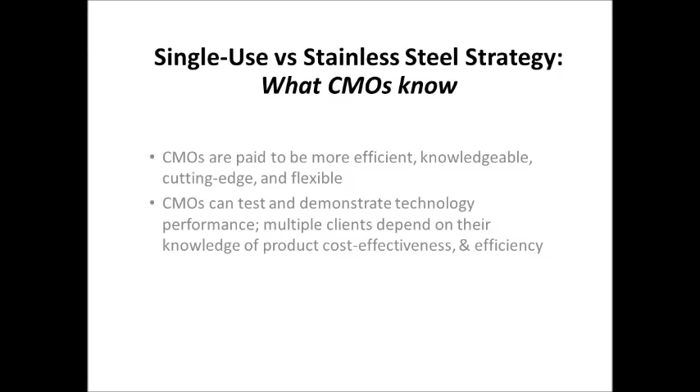So what we want to do is focus on what CMOs are doing in terms of cutting-edge technology. From our 13th annual report, one of the questions we asked is what are the new product development areas of interest to biopharmaceutical manufacturers and CMOs. We asked what are the top areas that suppliers—the likes of Pall, Merck, Millipore—should be focusing their development efforts on. Essentially, where's the R&D going to come from?

New product areas of interest is not where things are broken, and it's not necessarily where the opportunity is or where the future will be. It's where things are potentially broken or not quite fixed. So when we look at what the vendors are being asked to do, this is where vendors' energies should be focusing on fixing something.

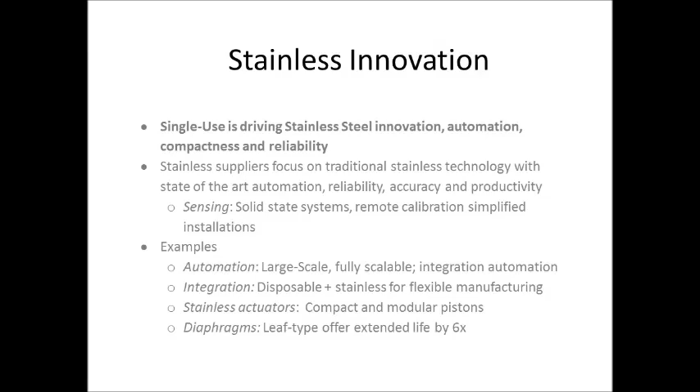So with that, what I'd like to do is turn the presentation over to our first presenter, Danny Vellom. Thank you, Eric—I'll just take your chair. Hi, I'm Danny Vellom from Sanofi Pasteur, and we're the vaccines division of Sanofi.

As an industry, the vaccine industry is pretty conservative. We've grown up making products for babies and infants, so safety comes first, and our ability to move into new technologies sort of follows that same philosophy.

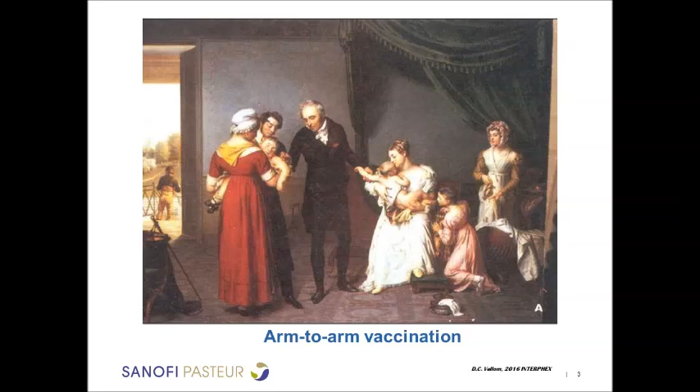First, the disclaimer statement, because we are big pharma—we'll go past that. I'd like to start with a slide of the very first vaccinees under Jenner 200 years ago, but then move quickly. As vaccine technology evolved, we got beyond Jenner and into the childhood vaccines of the early part of the last century, and it continued to evolve. The technologies have gotten more and more complex for making vaccines.

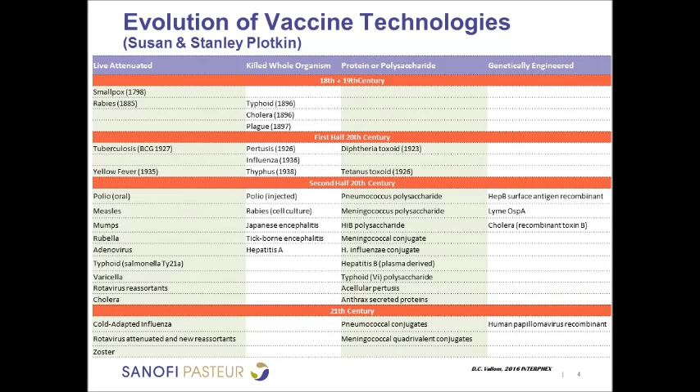Additionally, we have this continuing evolution away from stainless to disposables. So it's a complicated business being in vaccines—there are so many different antigen types and so many different modes of production. Most of my work has been in live viral vaccines.

And in particular, relating back to the first slide, my first product development effort that fell completely under my responsibility was for the new cell culture-based smallpox vaccine. It's a unique system in that we're growing vaccinia on suspension cells, vero cells. The vaccinia virus is too big to filter sterilize, so everything we had to do from the get-go is aseptic.

We had to integrate quickly because after 9/11, we had to integrate everything we could with single use, since fabrication time and engineering time is much longer with stainless. So we jumped into it quickly.

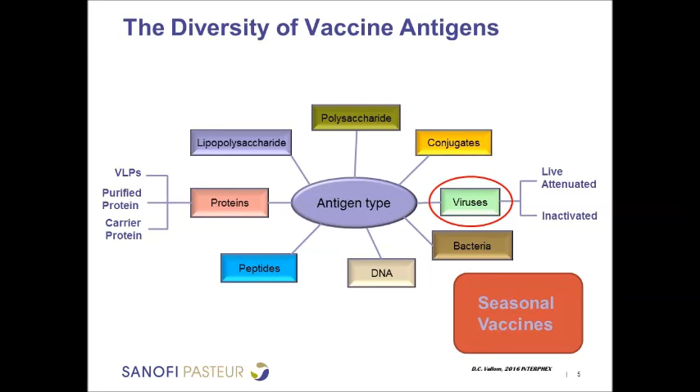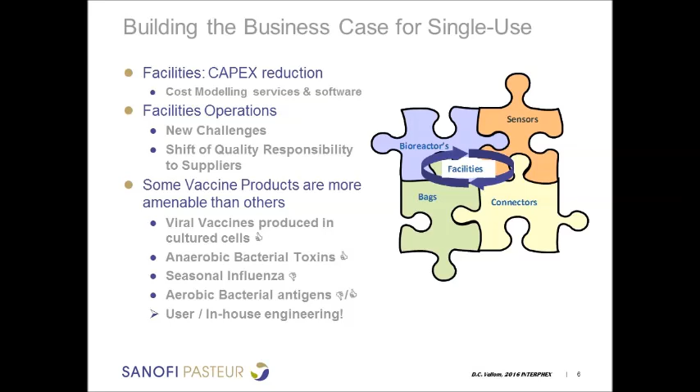The spectrum of available technology within the single-use realm has expanded and continues to, but with this expansion we've had to start to worry about standardization and how all these things are going to fit together. And then, as Eric mentioned, leachables and extractables have become a major focus recently.

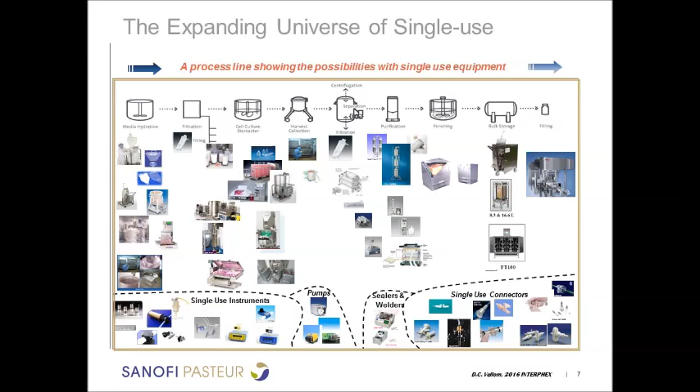But we've had to focus very much on a supplier relationship, because just getting a bioreactor bag in the mail or in a cardboard box doesn't get you to production. A lot of time is spent working with suppliers to establish how these things are going to be unfolded and installed. This is completely new to our operators, so training has become a huge piece, and that interface with the manufacturers in how to install and make appropriate use of their equipment.

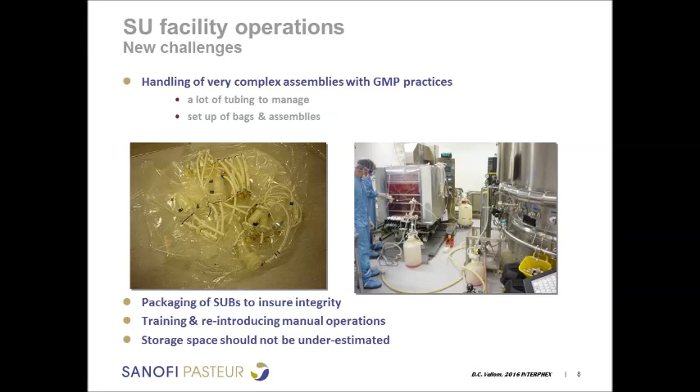So a couple of take-home messages. There are multiple benefits of working with single use. We end up not with completely single-use systems in most cases, but hybrid systems where certain pieces of equipment we have to rely on what was older technology for TFF and cell disruption, for example. These are inherently focused around high pressure and steamable systems, and so we have to then integrate the pieces that we can with single use.

But you also have to consider, not on the downside, but as important considerations, that this is becoming highly manual in terms of installing and appropriating, putting together appropriately your process gear. There are lots of new competitors out there in the marketplace. We worry about biosimilars and everything, because suddenly processing becomes accessible to almost anybody. It's essentially self-engineered. And then our change control system has struggled to move from stainless into the single-use realm because of the new sets of constraints and compliance measures around consistency of the single-use material that we get in.

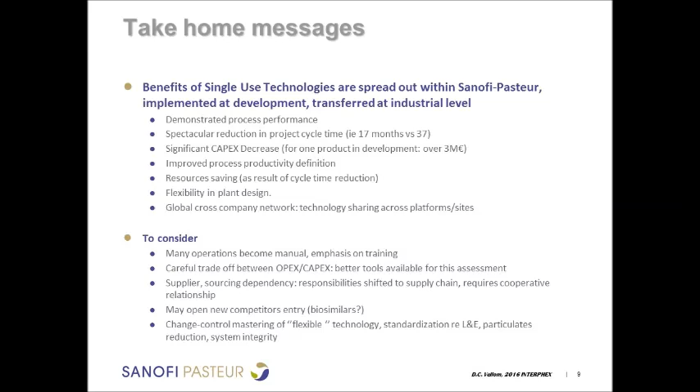And I'll stop there. The idea here is to start the conversation, so I went through this quickly, and thank you for your time. Thank you.

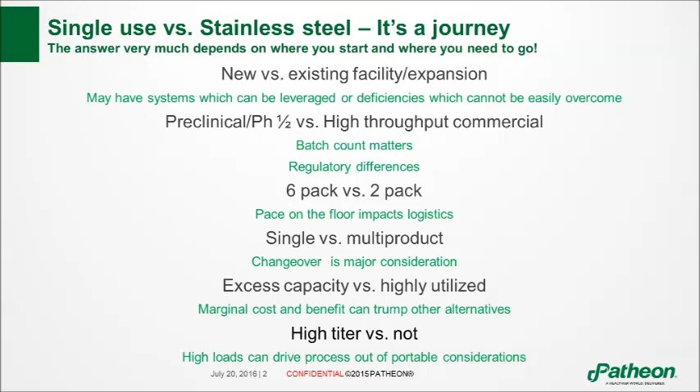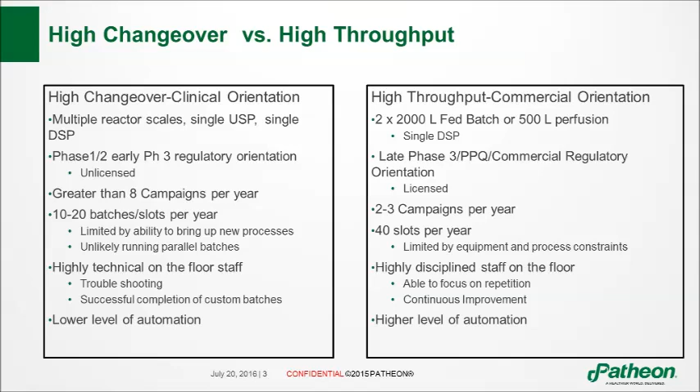So there are a lot of different components, a lot of different things you need to think about when making the decision. So what we did is we looked at two different operating paradigms. I would tell you there isn't a single system exactly like this within Patheon—these are kind of idealized systems. One is a high changeover situation for early stage products, and one is focusing more on commercial products. When you look at it, and came to the end of the day, the equipment was very much similar when we came up with our ultimate solution. But the people, the number of changeovers, the skill sets you need in both of these situations are very, very different, and it will impact your decision making.

So what we ended up doing, to develop a thought process, is we looked at a lot of the existing single use analyses, and a lot of them were single use versus stainless. We were interested in, hey, where are we with a hybrid? A lot of them were starting off at a low ramp. We were interested in, if we put a facility out there, low utilization as a contract manufacturer just wouldn't work. So we wanted to look at what happens when we drop in there and start off at well above 50% utilization, and situations like that.

And the other thing that's maybe a little different about a contract manufacturer is we're running multiple trains in parallel, whereas a small biotech company may never even come on the radar screen. But if we're running 3 or 4 downstreams in parallel, it really changes the game in terms of buffer prep, media prep, etc. So you've really got to think about where you are and where you want to go. If you want to do only clinical, you'll end up in one location. If you want to run a lot of lines, a lot of systems and support those, you could end up with a completely different answer.

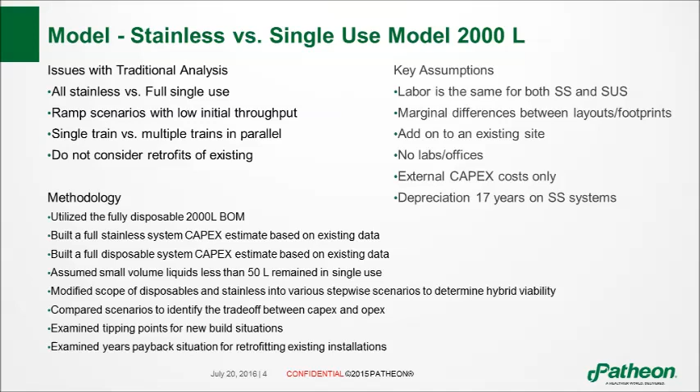We looked at the plant in basically 3 different components for these purposes: one was the prep systems, one were the hold systems, and one were the product contact systems. In this case, we looked at fully disposable and asked, what happens if we just change over our prep systems? We took our CapEx model, came up with a number of roughly $9 million for the CapEx differential, calculated a depreciation, looked at the OpEx differential by eliminating the disposables and other components, and then we ended up with both a tipping point and a payback.

The tipping point was roughly around 20 batches per year, where you might want to think about going from single use to start integrating stainless. The payback, on the other hand, was 300 batches. So if you're doing 20 batches a year, that's a long time. But if you're running multiple lines in parallel, and you think about running 40 batches a line, doing 100 batches a year, you could end up paying back on that in 3 years. So you end up with a completely different answer on the same analysis, depending on where you start and where you finish.

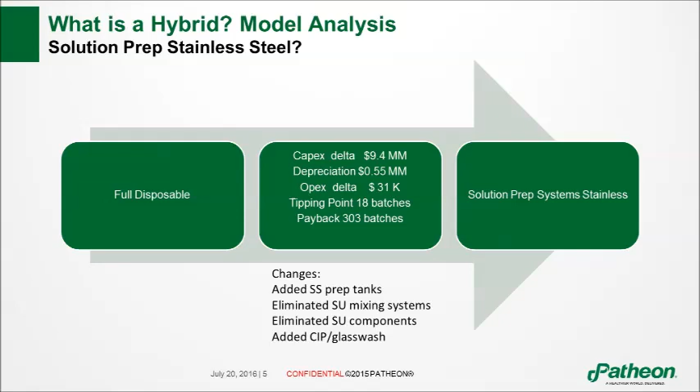And then just to wrap this up, looking at a few different parameters: what would cause you to want to do your solution prep in stainless, going from a fully disposable setup? Well, really, if you're running over 20 batches a year, that's when we want to start looking at stainless. But since we have a number of lines in parallel, it's probably something we would consider.

When would you want to flip your hold systems from single use to stainless? Well, at that point in time, you've got to start running higher throughput. You're now out of the realm of a facility-wide support system into the realm of a single line, and you've got to get better paybacks there. So your payback on the front end for your prep systems was higher. The payback on your hold systems was not as good, but there's still a lot of components there.

And then I'll finish off looking at product contact. Product contact was very interesting because there aren't as many disposable components in product contact as there are in all the support, the buffer prep, the buffer hold. As a result, once you've taken all the low-hanging fruit from your bill of materials, all you've got left is the product contact. Product contact is where your changeover, your cleaning validation - there are a lot of expensive systems there from a piping perspective, expensive components from a changeover perspective, and a really high hurdle to jump to get yourself from product contact going from single use to stainless.

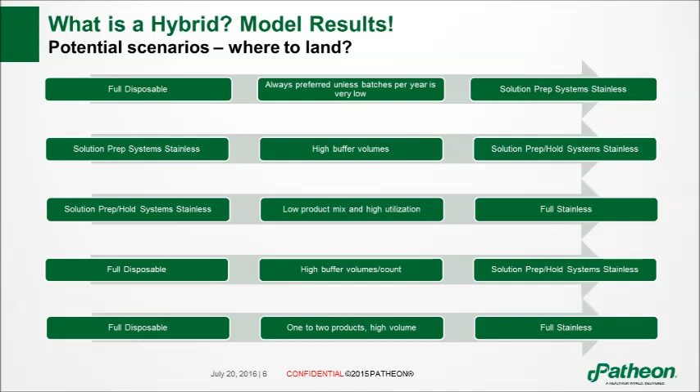Keep us moving on. Thank you. Thank you.

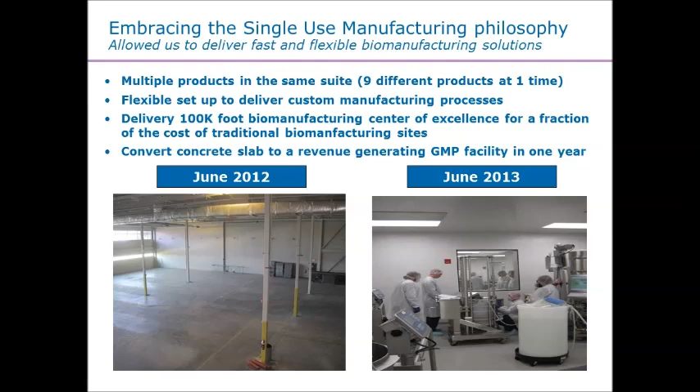I think the biggest key here was we made that decision in June of 2012, and by June of 2013, we had a facility that was up and running, making GMP material. And we were already starting from a revenue standpoint, being able to generate revenue out of that facility. That really can only take place from a single-use standpoint. That's really one of the big drivers of where and how we were able to embrace single-use as a technology, and what it gave to our customers.

It gave us the ability to turn around batches faster. We were able to reduce risk and simplify our design so that we're able to move products through. And when we're dealing with small to mid-sized companies, they need to get to that milestone. For us, single use really gave us that potential to deliver speed to the market space.

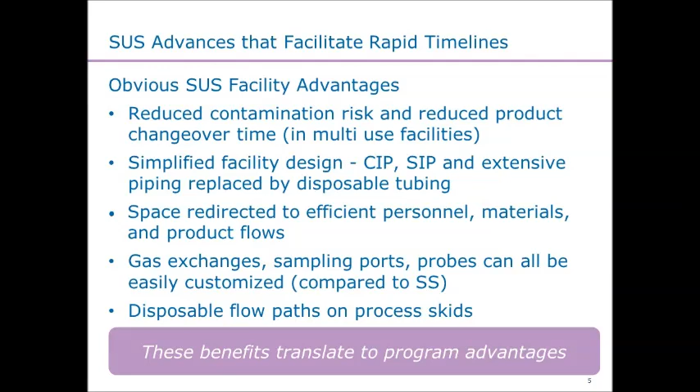That married up very well with our cell expression technology that was doing that already, and that was one of the main sells of the cell expression technology: its speed. So now we were able to marry our manufacturing philosophy with our technology and with the needs of the market space.

So now as we're looking to expand from our technology standpoint, these are some of the things we had to have from a points-to-consider standpoint that made that transition very well. Ultimately, supplier relations - that partnership that you have to have. It's not just buying a box, as Danny said, of getting a bioreactor shipped to you. It's that relationship that you have to build.

Because ultimately what you're doing is outsourcing your validation, so you have to make sure that supplier relationship is very, very strong. Also training - Danny touched on this as well. Training is a very important part of what we're doing, because it is something new. We had our hiccups in the early stages, where people are talking about leak integrity of bags and those types of things. A lot of it had to do with how we were employing and implementing them. That's where the partnership with your supplier, making sure you're training your personnel, is so critical to how we transition from a stainless steel system to a single-use system.

So with that, I will try to wrap it up and get it over to Susan.

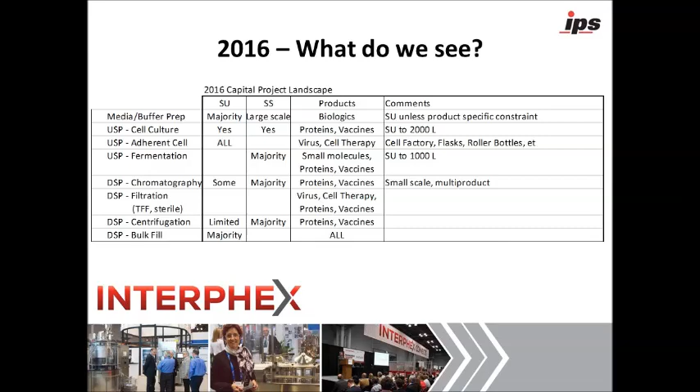You've got the opportunity to use single use, and we do use single use because that's a place where it really provides value. You tend to be at lower volumes by the time you get there, and you tend to be in a suite that you may share and change over a lot. So those are the same drivers that we just heard about.

What should you be considering when making this decision? In the end, it comes down to your project, your company, your culture, everything that is going to be right for your business. Your support staff, your engineering groups, whether internal or external, can help you think through those alternatives and make the decision that brings you the best benefit.